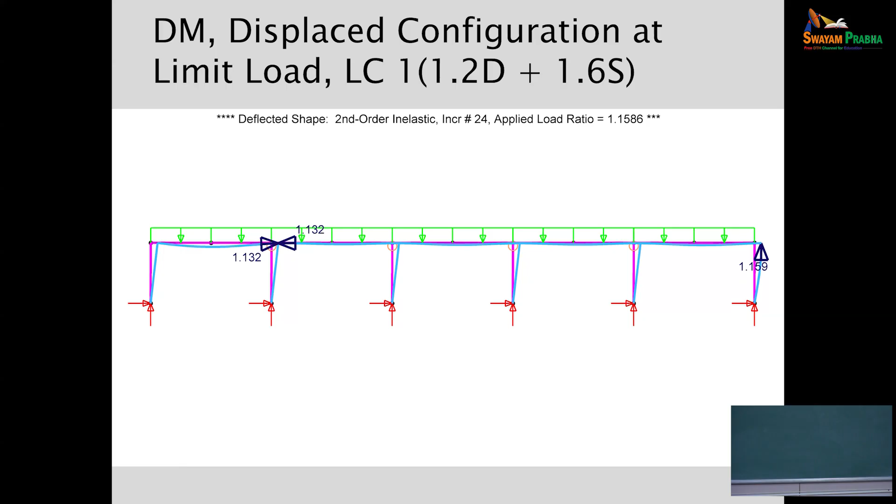And I actually skipped this here. The white dots on the effective length method here, these points, are where, if we're doing the so-called unity checks, the verification, we got to 1.0. That means we've reached the strength check. From elastic design, we don't allow any further load. So the effective length method, with the notional load in AISC, is basically saying you can only get 80% of what we wanted to apply on this frame.

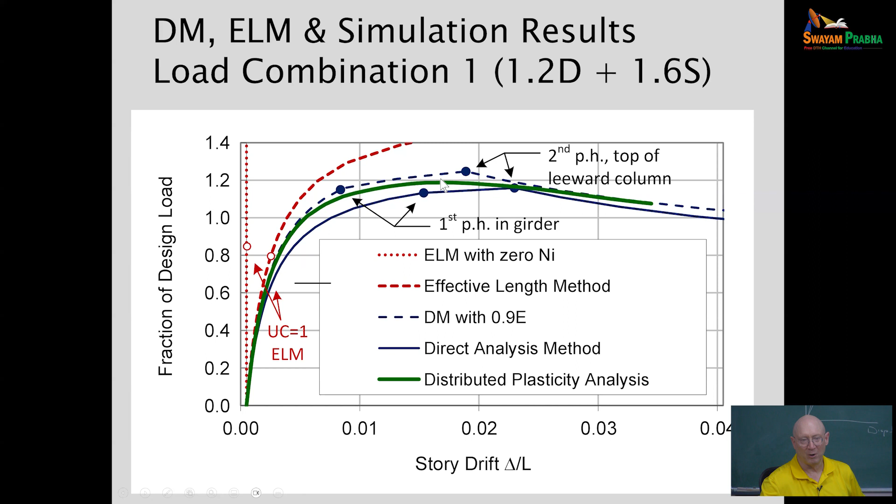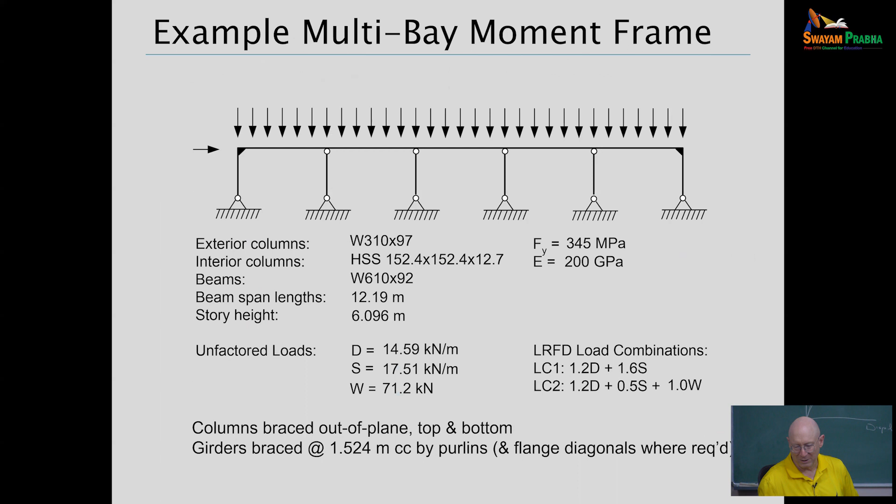And using either of those approaches, the alternates to the effective length method, you say, okay, in terms of column strength here, we're getting 46% more strength out of that column. All right, you don't get something for nothing. We didn't take it that far because, remember, the load we want to design for was 1.0, and this is taking it to essentially 1.16, so 16% larger load than what we were designing this frame for.

And if we took it all the way out to that capacity, the moment that we have at the top of the column, which is also the moment in the roof girder, the moment in the connection between the column and the roof girder, the moment we have to design the column for out-of-plane lateral torsional buckling, is 133% larger. So that's 100 plus 133%. Okay.

The first plastic hinge is actually way over there, over the top of the first interior column in the girder. So that's the first point, the first plastic hinge, and we're plotting the behavior where the second plastic hinge occurs. At the leeward column. At the leeward column, okay. So in the direct analysis method, although we are not explicitly talking about the plastic hinges, we are indirectly relying on the plastic hinge capacities. Yeah, I'm kind of glossing over a lot of things.

Again, as I said yesterday, my aim was to go relatively light with the direct analysis method, but tie it in with Eurocode, and so I've just made the comments about that. Sorry, I lost my train of thought. Tell me your question again. So we are not explicitly talking about plastic hinges in the direct analysis method, but indirectly relying on that. Yes.

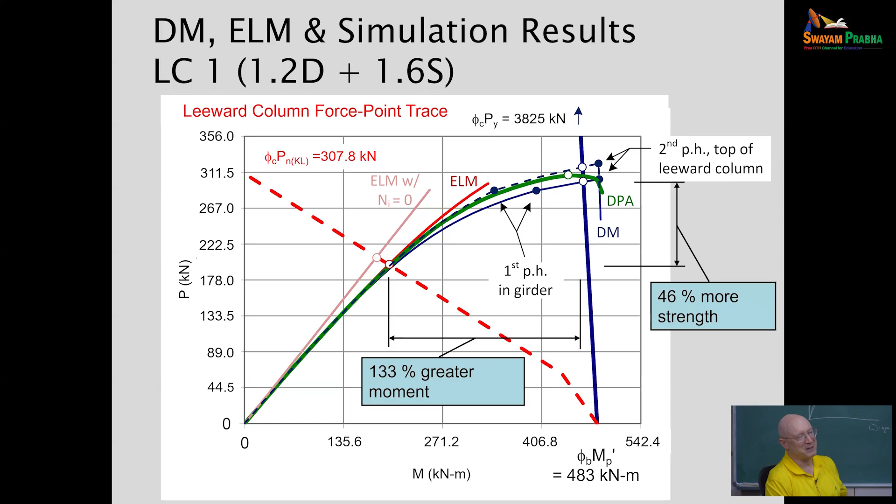Distributed plasticity. Yeah, right. Pretty much a 0.9 phi factor on yield, a 0.9 factor on the elastic stiffnesses, and then as a judgment call, if you're running a plastic hinge-based solution, is that good enough to say I'm capturing all the effects or not? The intent in Appendix 1 would be you'd use a 0.8 with the plastic hinge-based solution. Okay, thank you. Yes, everything up to this point was elastic design, and then I took it a few steps further to tie it in with plastic hinge formation to evaluate the capacity of the frame.

So this is a graphic to try to get closure and make sense out of: is the effective length method okay? We've been designing with it since the beginning of time, and things aren't falling down. It's generally okay, but what's going on?

So if we compare the two approaches, and you could say direct analysis method, the Eurocode approaches that do not do a stiffness reduction are analogous to what we're talking about here with direct analysis method. So in both of these approaches, we're essentially using the same beam column strength interaction curve.

But with the effective length method, our anchor point for the axial term is based on a buckling solution. In direct analysis method, it depends. The routine application of direct analysis method, we calculate the column capacity based on K equals 1, essentially a braced buckling strength. You could use K less than 1, but the argument was we're doing direct analysis to try to not have to calculate an effective length factor, so please don't tell us to do direct analysis and then calculate one.

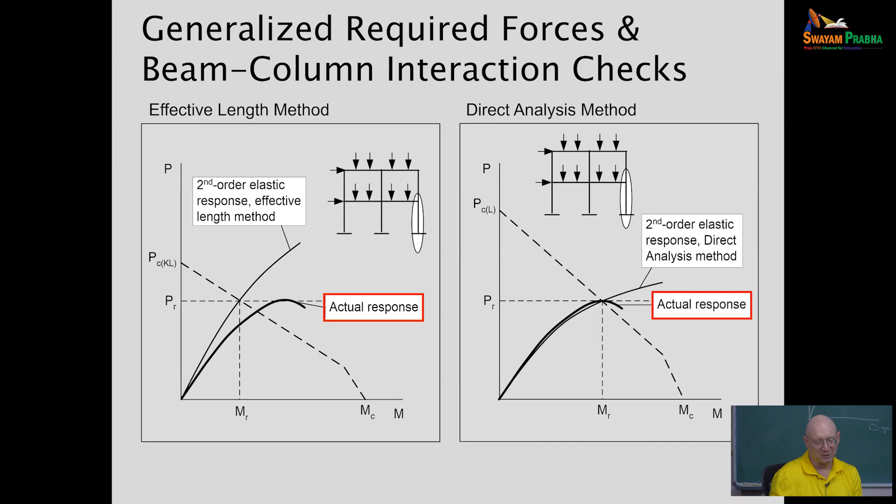Now with the direct analysis method, this is where I say the direct analysis method is a poor person's test simulation. Saying, hey, I really don't have the time or the capabilities to do a distributed plasticity full nonlinear analysis. I'm trying to design this frame. Okay, but can I do something fairly coarse that gives me a coarse representation of what's really going on in the structure? So that's the attempt with direct analysis or comparable methods in the Eurocodes, trying to match that actual response. And so in that context, both methods are legitimate.

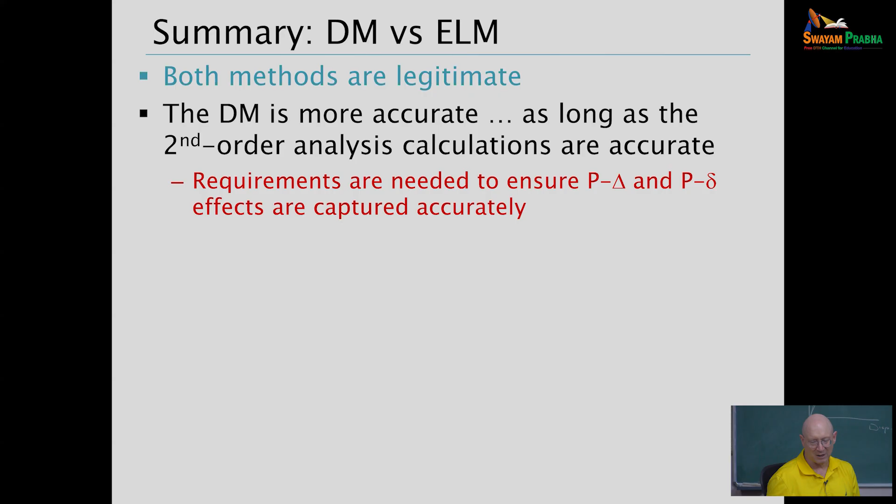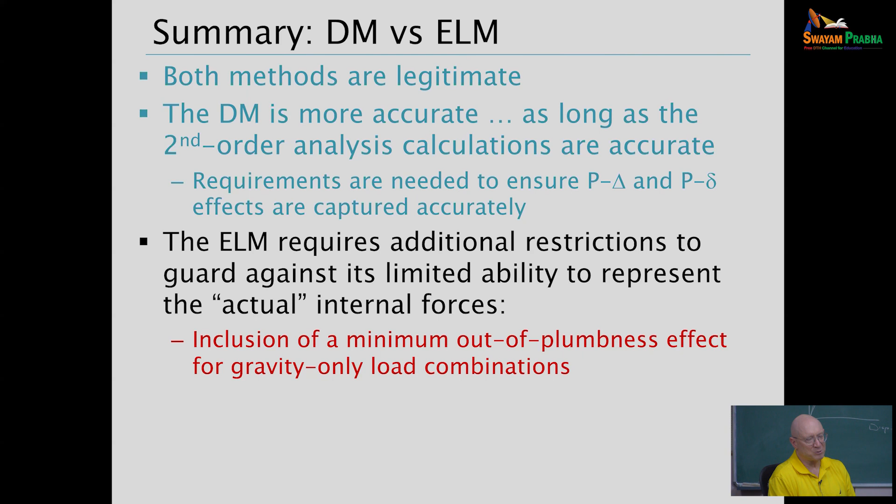The direct analysis method tends to be more accurate as long as you have an accurate second order analysis. So you need requirements to try to ensure that. The effective length method needs additional restrictions to guard against its limited ability to represent the actual internal forces. And so in the AISC practice, we need to put on a notional lateral load for gravity-only load combinations. I see the Indian code also does that with a 0.005.

And in the AISC practice, if you're designing by effective length method and your B2, or your ratio of second order lateral displacement to first order lateral displacement, is greater than 1.5, then the code tells me I'm not allowed to use effective length method. I have to go to the direct analysis method to do the solution.

The reason for that is, you can say, well, wait a minute, my design was conservative for this frame we just checked. And our B2 was much larger than 1.5, so by the code, effective length method would not be allowed. You say, wait a minute, it was conservative, it was okay. Yeah, but we don't know when it might go the other way, or it's hard to determine that, so we're going to restrict it.